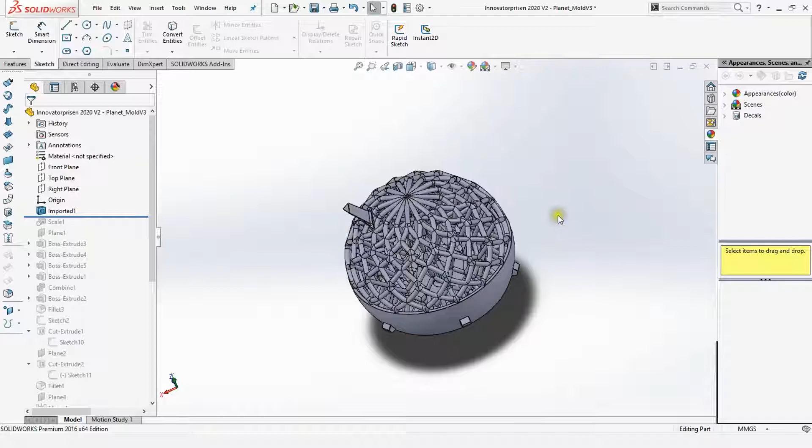This is a part we made in collaboration with the Danish Innovation Fund and the Danish design studio Alexia and Tryde, who designed it and sent it to us. More often than not, we get sent parts bigger than our build area actually allows, and this is one of those cases, so we have to do a split mold.

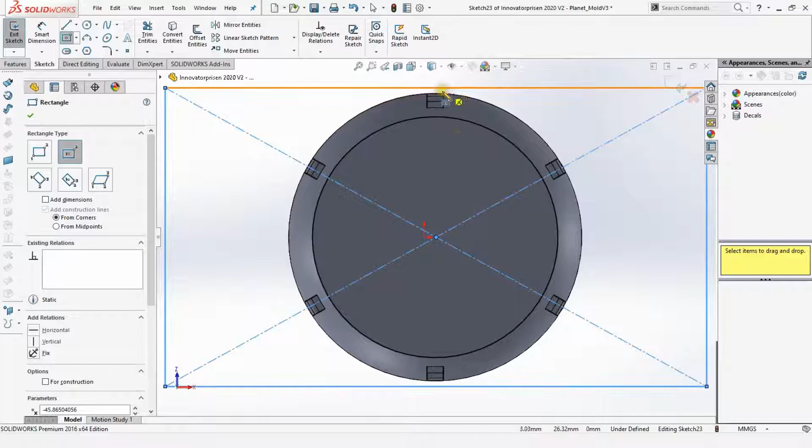Our build area is 54 by 96 millimeters, so let's see how that would look here. So 54 by 96 - it's definitely long enough, but as you can see here, we only have something like a millimeter of wall thickness here and down here.

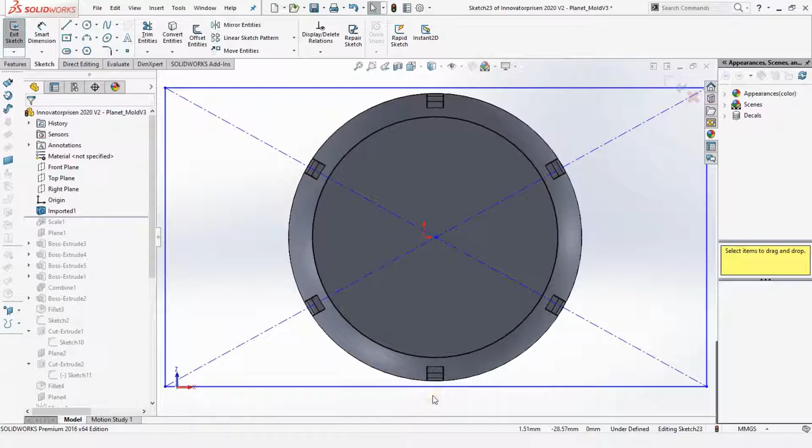You can go ahead and try that, but I wouldn't recommend it. I recommend that you have at least 3 millimeters, and if possible, make it 5 millimeters of wall thickness. So instead we are going to do a split mold of this, and I'll show you how.

But let's begin. The first thing I'm doing is adding a scale factor to it, because the material that we injected has shrinkage, and we are compensating for that here.

You can do it in any other software, and in the future software of the Adline you can also do some scaling, but I prefer to do it in SolidWorks beforehand.

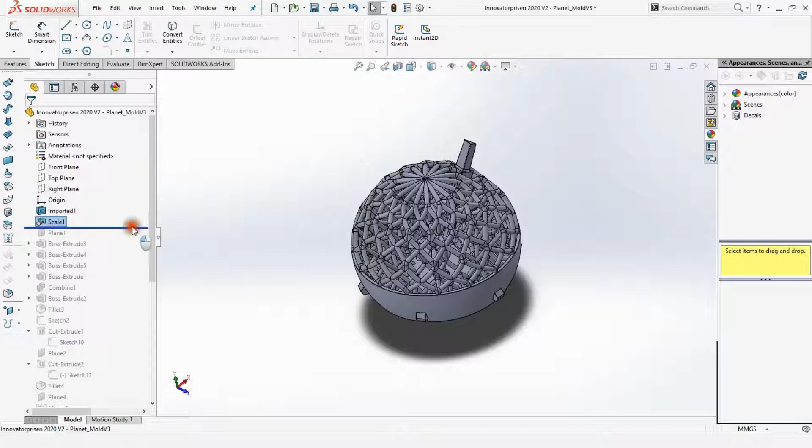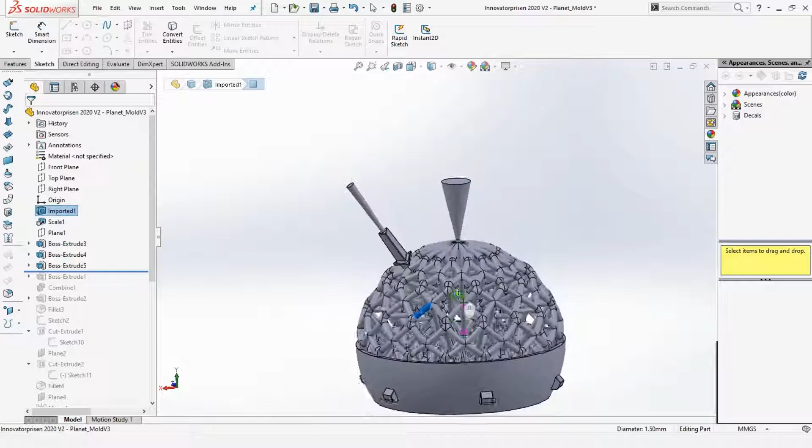I've begun adding a small vent down here, which will grow up and be this, and we're adding a vent over here as well. These two vents are the only ones we'll need, actually, because you'll be surprised at how great these lattice structures actually fill up when injection molding.

We are going to use this entire surface as a gate. If you are an injection molder by trade, you'll find it perhaps a bit weird, because that's not so typical, but it actually works quite well, and we're doing it in many of our molds. It's kind of like the double helix, if you saw that in one of the other episodes.

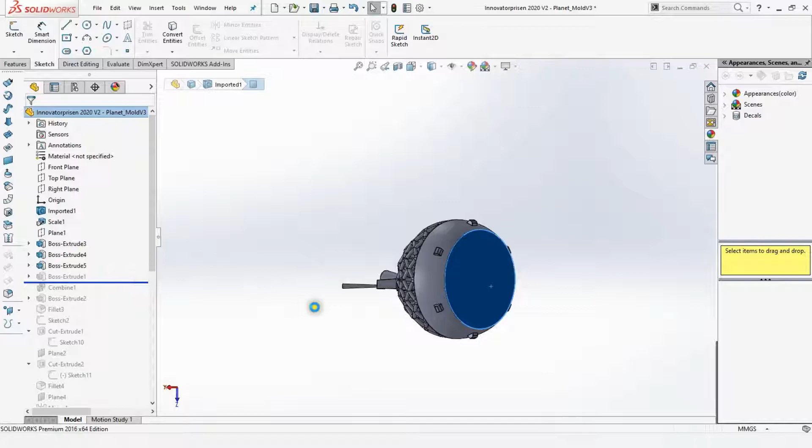Now we will add the mold around it. So the mold bottom goes to this bottom surface of this part. So when we subtract it, it will look like this.

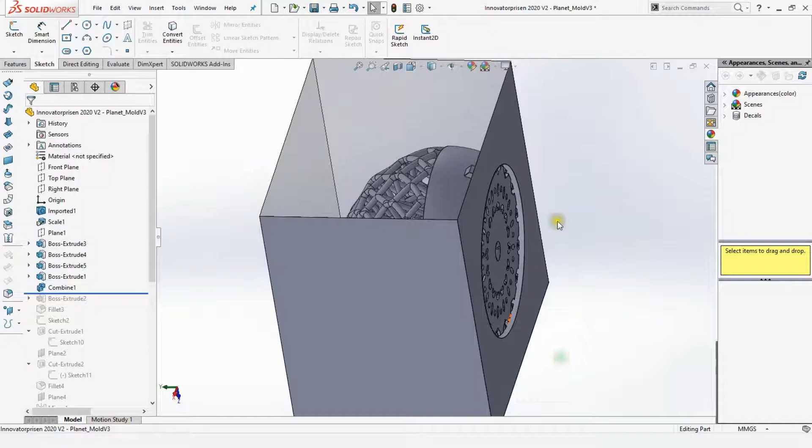So this is our entire gate, and it's bigger than the sprue on the injection machine, but the surface will close up to the fixed plate anyways, so it will be quite nice, and you'll actually have a quite nice surface here.

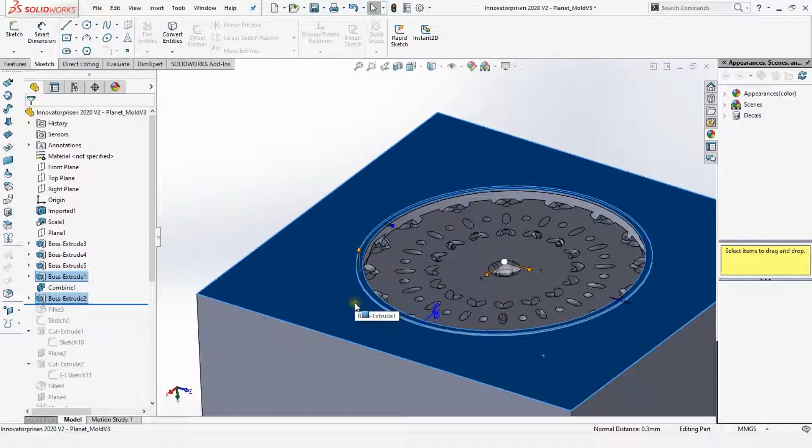So I've added this rim here. It's both for getting a better closure when we injection mold, but also so that we have, as you can see here, 0.3 millimeters that we can just mill away, and then this surface will look nice and clean.

We're not religious when it comes to 3D printing. We know that some things just work really well - that's not 3D printing, so we tend to do milling as well, and all other sorts of machinery that can help us. So definitely go ahead and do that.

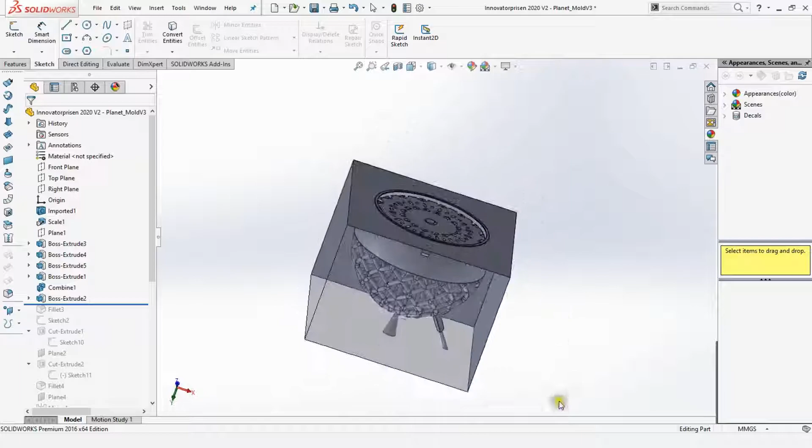Okay, so the fillet here will allow us to put the mold in our frame, because that's how it looks, with a radius of 8 millimeters.

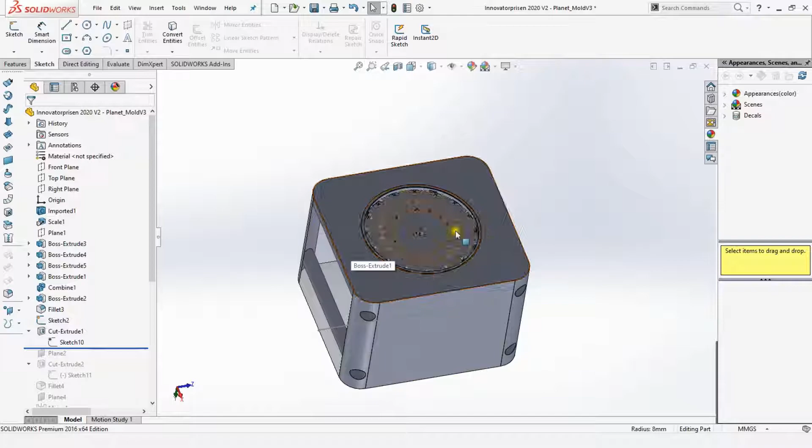So now we're adding these 4 perforations. To get these parts, after we split them, we need to make sure that they are completely close together. So we use nuts and screws for that - this is what these holes are for.

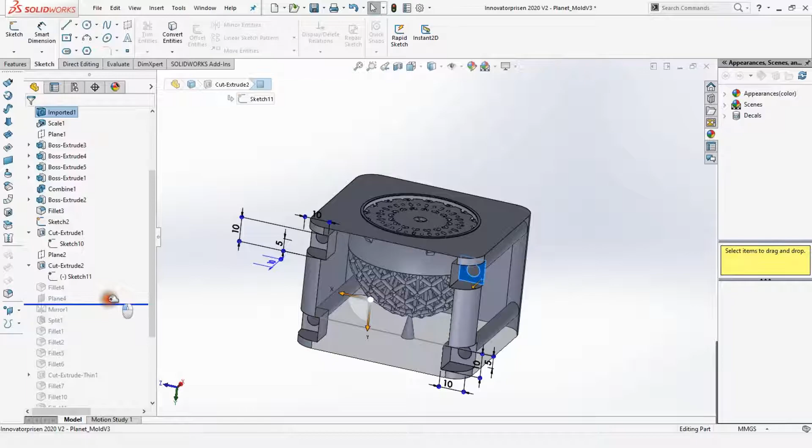And over here you see that we have made room for the nuts. So we've added some fillets here just for a better transition between the layers, and we've done that all over. So now we come to splitting.

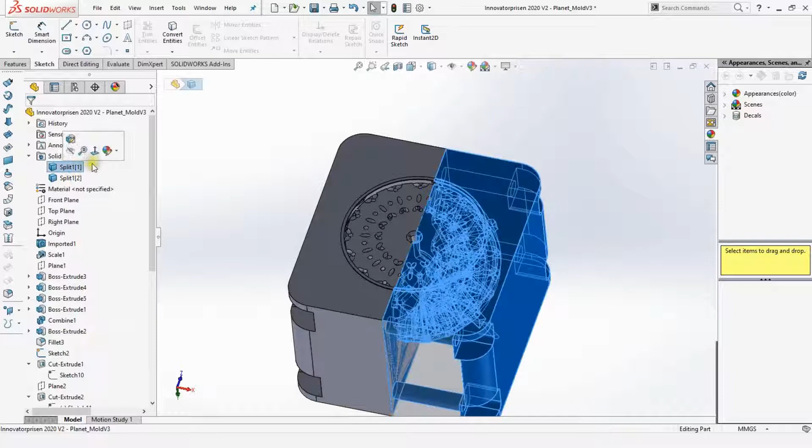Okay, so let's check one of the parts out. This is how it looks inside. Let's check how it prints.

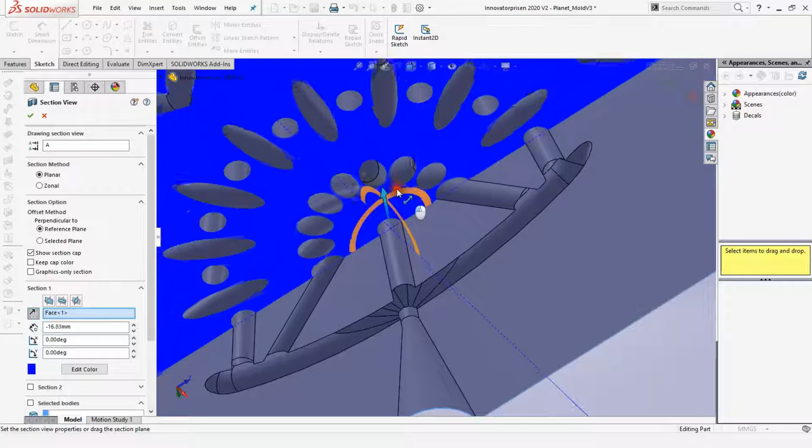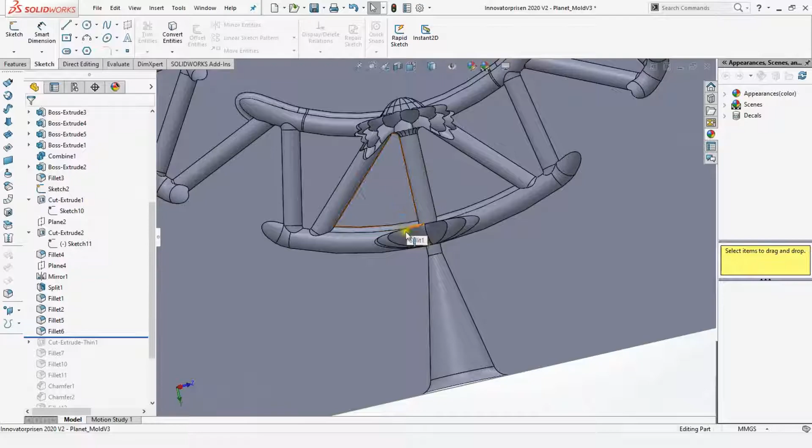So as you can see here, this didn't look very good. So what I had to do was make some fillets so that it's better. There's no coming around that these will definitely look a bit wonky, but since it's on the inside of this lattice structure, you won't notice it, and that's just how it is. There's really no way around that.

But we've seen the end result, and it's looking really good. You can check out a video that was put up on both AddiFab's site and also the Innovatorprisen site of these parts, and they look really cool.

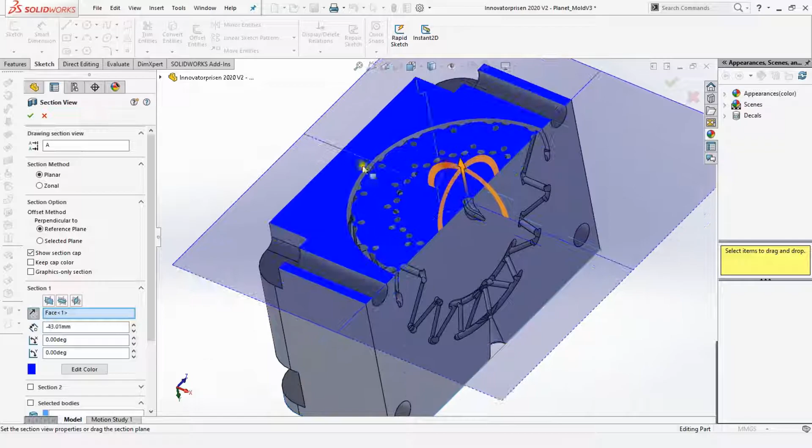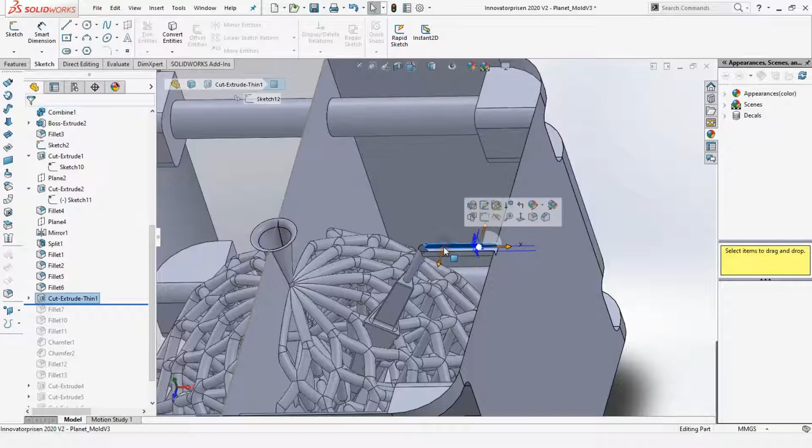So let's get the other part back on here. And now I've added this small track here because we are printing on this side, so if this was directly to the build plane, it would just clog up. So a small track to allow the resin to flow out - that works really good.

So next thing is we're adding some fillets here, and they're just again for looks. I like rounded corners.

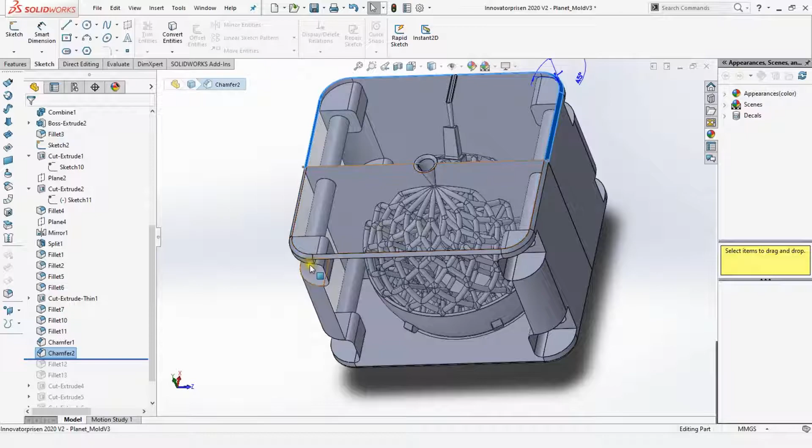And then we're adding some chamfers here, and that is both for inserting the mold, but also for scraping them off the build plane. It's always good.

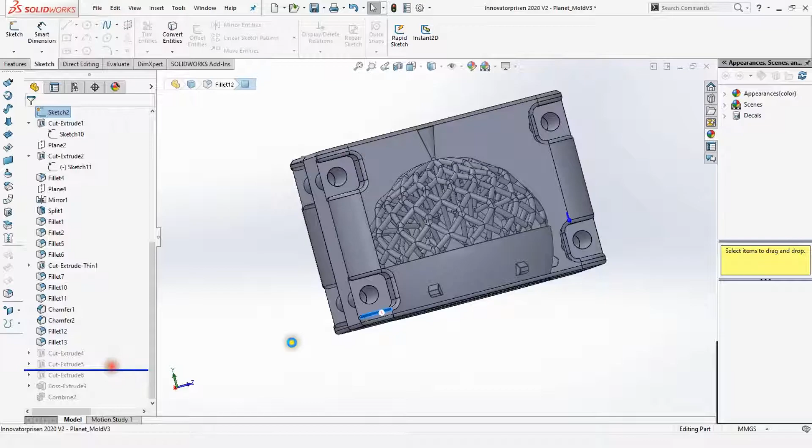Now some more rounded corners here, but actually I think what we're doing with this part later on is we're actually removing the bottoms of these because they're not really necessary. So this is actually how the mold will look.

Now, as you can see, we have some pretty heavy overhangs here, so I am actually adding some support structures for this.

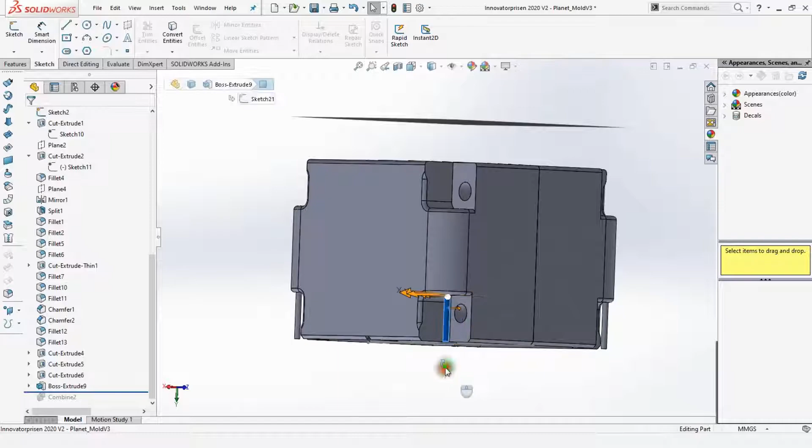This surface is not really critical, but still it has to be somewhat nice so that we can actually fit the screw in here. So 2 pillars on each side, that should be enough, and they're really easy to get off afterwards if you just don't cure the part. If you take them off before curing, that's easier for you.

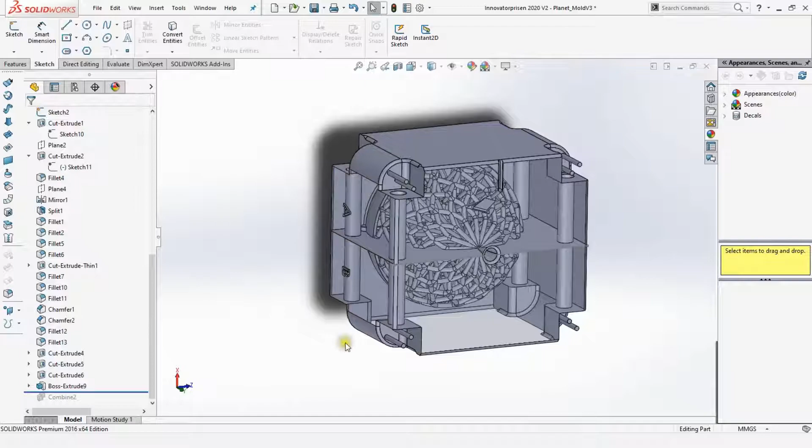Then I combine so that they fit together here. Yeah, the combination here, as you see, was just to get these pillars to combine here.

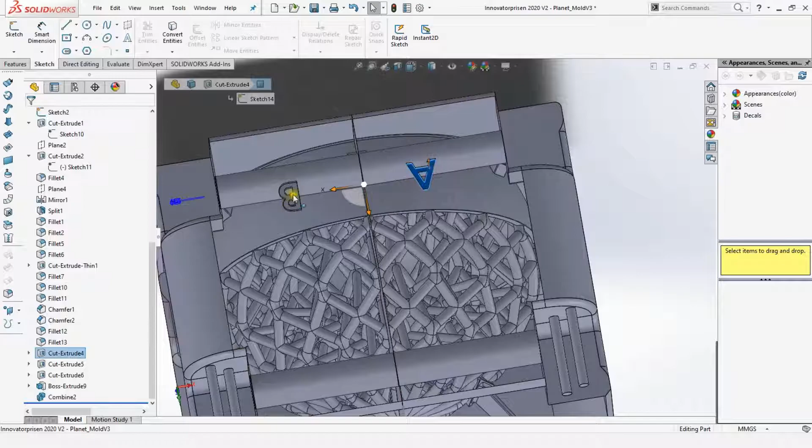And that's basically it. I added an A and a B because these 2 parts look quite the same after printing, except for this part here. So just to make sure that you don't mix up anything, and for our operators to know how many parts of each they have easily, I do it.

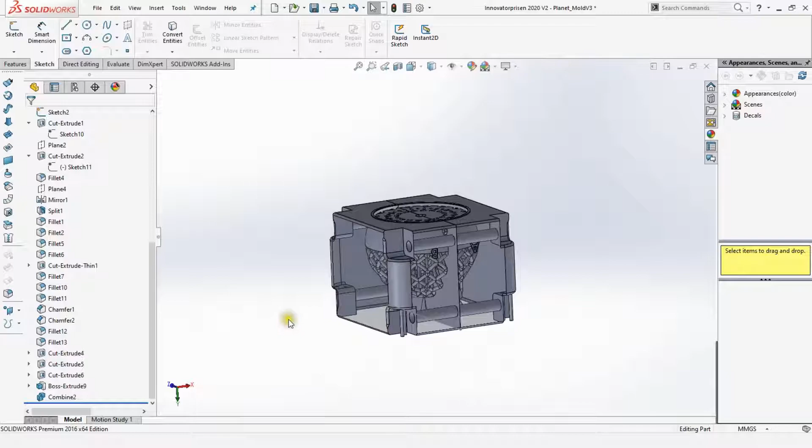And I tend to do that a lot when we have split molds. And yeah, now we have a mold ready for injection molding.